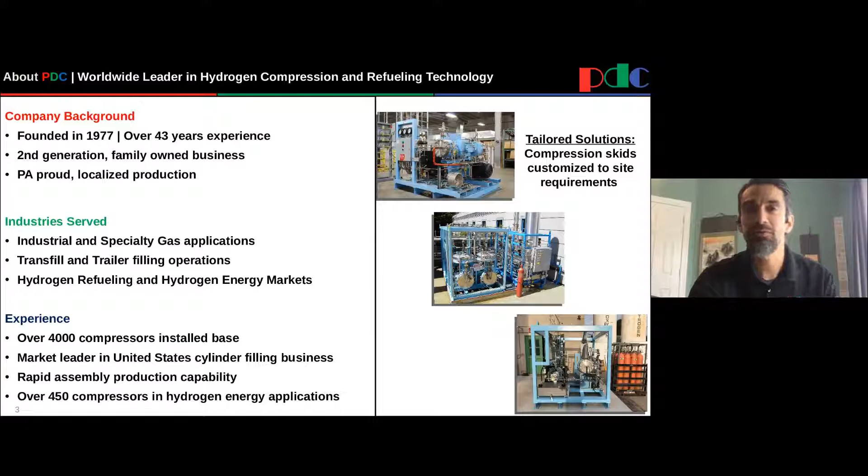At PDC, we deeply believe in a customer and market-driven focus. At PDC, we listen to our customers and the market, and then we create solutions to solve your customer problems. We provide a world quality product, which is provided to the world's codes and standards. Wherever in the world a PDC compressor needs to be installed, we could meet any of those codes or standards, whether it's ASME, CE, Pressure Equipment Directive, KHK, High Pressure Gas Law for Japan, the Chinese pressure vessel codes, KGS for Korea, Australian requirements. Wherever it is in the world, we could support your code and standards requirements.

At PDC, we have a vision to seek to make the world its most productive self by using industrial and specialty gases. And then our hydrogen vision is to cultivate a business platform that propels fuel cell vehicle usage and hydrogen energy applications through the deployment of world-class infrastructure and service. And we do this through our world operations. So we have our headquarters here in the United States, and we have sales and service directly operated and owned offices throughout the world. So we have PDC China, PDC Korea, PDC Japan, PDC GK, and soon to be PDC Europe, which will be located in Germany.

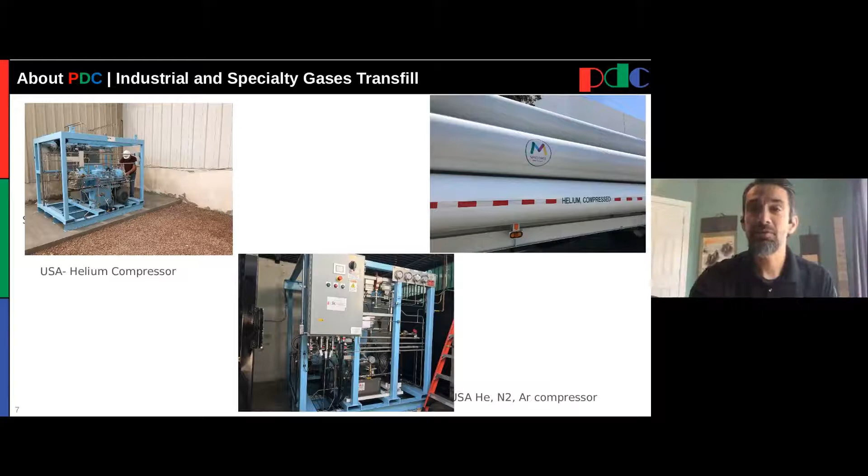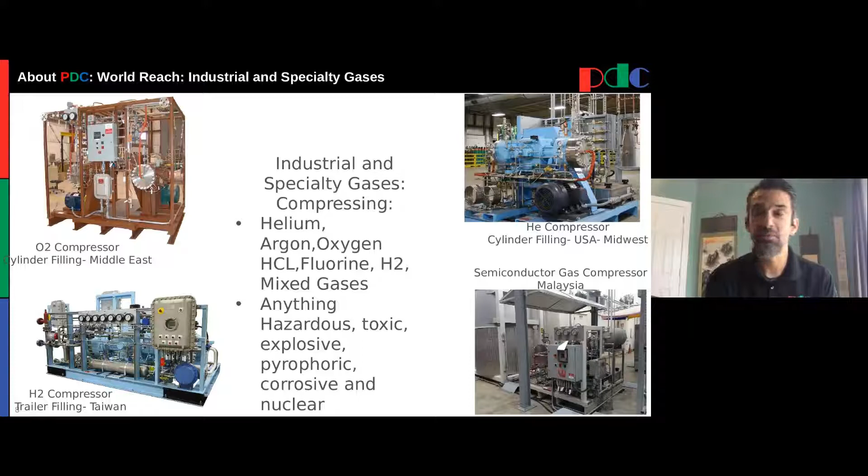Our core industries, as I mentioned earlier, are the industrial gases and specialty gas transfilling business, a variety of industrial and specialty gas applications from oxygen cylinder filling, helium cylinder filling, hydrogen tube trailer filling for industrial applications throughout the Far East, Southeast Asia, and the Middle East, semiconductor applications, and the hydrogen economy, fueling and providing high purity hydrogen for fueling transportation, people mobility, buses, trains, trucks, material handling equipment, and so on.

And how do we bring this to the market? We bring this to the market through our strategic partnerships, working with a vast network of regional partners and engineering partners to bring PDC compression technology with their local and specialized expertise to the markets that we serve. And WeldCoa is one of those partners that we're proud to share this webinar with today.

PDC is a proud partner in sustainability of the Philadelphia Eagles football team, and I will go briefly through their partnership in a slide coming up. With Ivys Energy Solutions, we're bringing novel hydrogen fueling technologies to a world market across the globe. And PDC is a partner with Argonne National Labs, which is a U.S. Department of Energy national lab in Illinois, where we are the patent licensee of pressure consolidations, which is a specialized algorithm for operating hydrogen refueling stations.

Our partnership with the Philadelphia Eagles is part of their Go Green sustainability initiative. The Philadelphia Eagles are the leaders in sustainability in sport, where they have a microgrid that offsets all of their event usage of power at their facility.

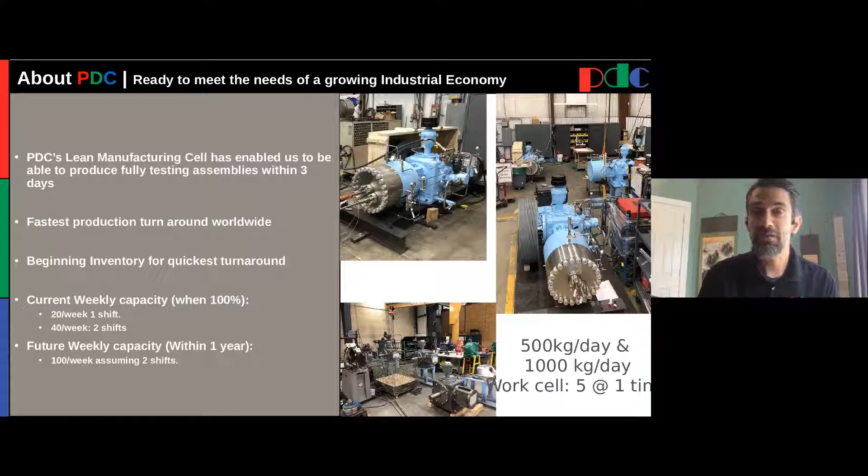At PDC, we're ready to meet the growing needs of the industrialized economy throughout the world. We have just expanded to have over 100,000 square feet of manufacturing space within our 3 facilities to support the industrial growth throughout the world. And we are growing and scaling for a lot of the markets that we're serving, whether it's industrial gas or also the growing hydrogen economy. And now we will go through a virtual tour of PDC in this video clip.

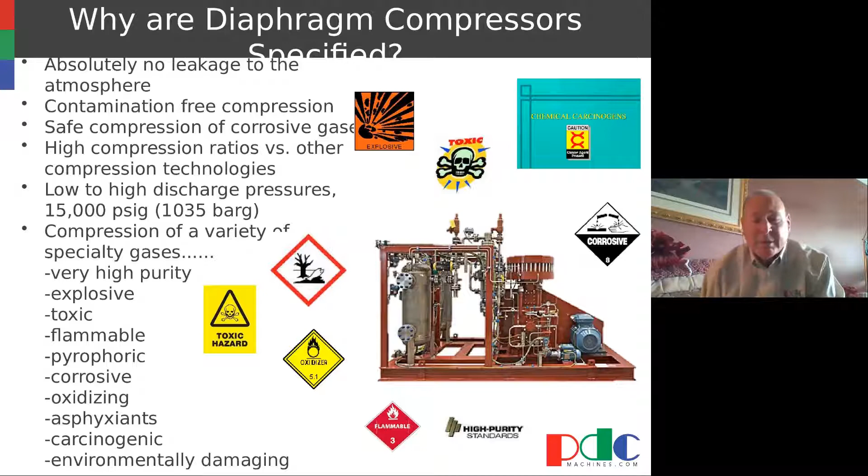So a diaphragm compressor is probably the most reliable compression solution for very demanding types of applications. By that, I mean they provide gas compression with absolutely no leakage to the atmosphere. They provide contamination-free gas compression, safe compression of corrosive gases, can achieve high compression ratios versus other gas compressor technologies, from very low to very high discharge pressures, up to 15,000 psi. Compression of a variety of specialty gases, very high purity, xenon, argon, krypton, explosive gases, toxic, flammable, pyrophoric, corrosive, oxidizing, a lot of gases that are very difficult to handle with typical piston-style compressors.

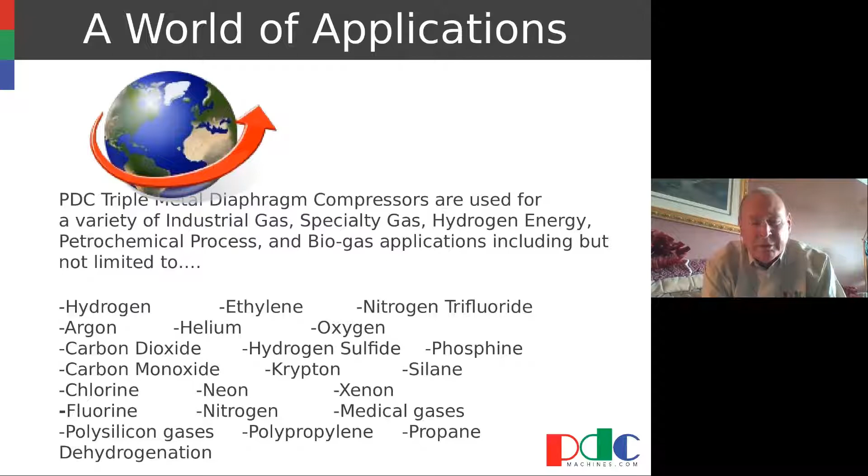PDC diaphragm compressors are used for a variety of the industrial gas, specialty gas, hydrogen energy, petrochemical processes. Hydrogen is probably the most common gas that our compressors are used with. Probably 70% or more of the compressors that we ship to the industry are being used for hydrogen in various different types of markets, but also nitrogen trifluoride, carbon dioxide, phosphine, krypton, silane, fluorine. So you can see a wide variety of different types of hazardous and high purity gases.

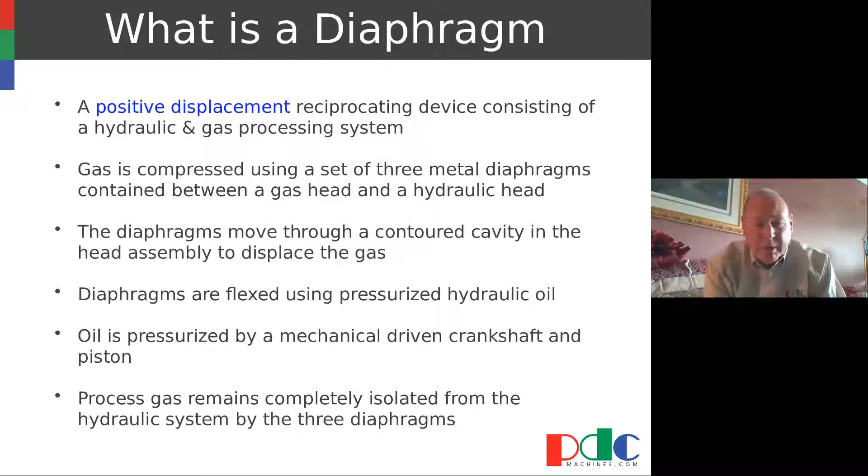What is a diaphragm compressor? A diaphragm compressor is a positive displacement reciprocating device consisting of a hydraulic and a gas processing system. The gas is compressed using a set of 3 metal diaphragms contained between a gas head and a hydraulic head. The diaphragms move through a contoured cavity in the head assembly to displace the gas, and they are flexed using pressurized hydraulic fluid. The oil is pressurized by a mechanical crankshaft and piston. Process gas remains completely isolated from the hydraulic system by the 3 diaphragms.

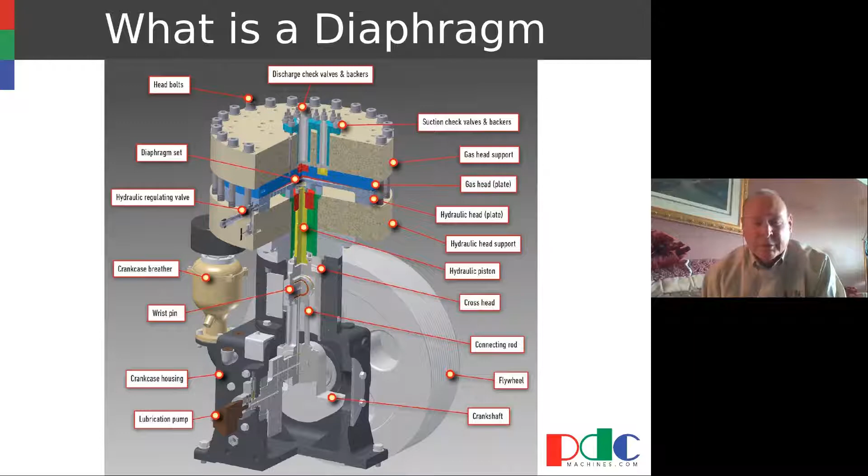So, a cross-sectional view of a diaphragm compressor, you can see the different parts of it. It consists of a crankcase with a flywheel-driven crankshaft. We're also moving towards some gear-driven models as well. That's connected through a connecting rod to a crosshead attached to a hydraulic piston, which creates the hydraulic pressure in the compressor. Diaphragms are sandwiched in a contoured cavity and sealed around the circumference by a gas side O-ring, hydraulic side O-ring, and a secondary leak detection containment O-ring. Gas enters through an inlet process check valve and is pushed out of the compressor through a discharge process check valve. Here's a short video of how a diaphragm compressor works.

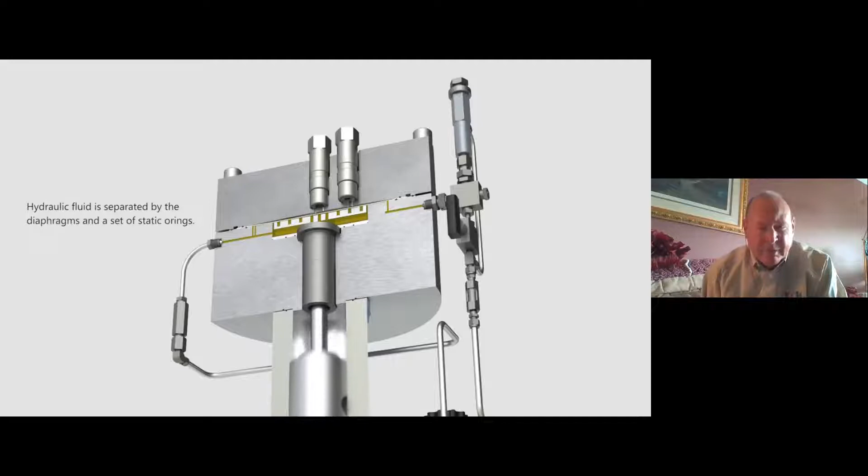Diaphragm compressor is a reciprocating machine, as I mentioned, that uses high pressure hydraulic fluid to drive 3 metal diaphragms. Hydraulic fluid is separated by the diaphragms and sealed by a set of static O-rings around the circumference. Static seals prevent process gas contamination and enable 100% purity of gas compression.

You can see the diaphragms in the compressor moving between the 2 sides of the contoured cavity. Gas enters through a suction check valve. At the same time, the piston is driving from bottom to top dead center, compressing the hydraulic fluid. When the piston reaches top dead center, gas is discharged through the discharge check valve.

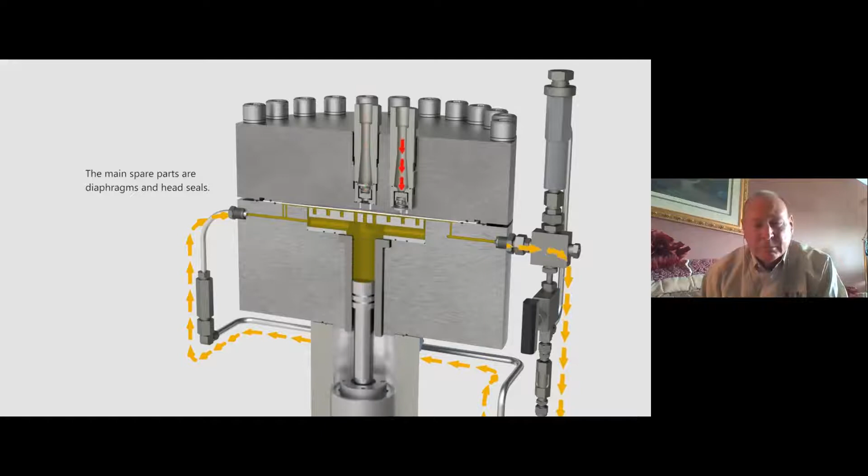Main spare parts in the diaphragm compressor are the diaphragms and the head O-ring seals. The oil is injected into the piston area through an integrated injection pump driven by the compressor crankshaft that provides hydraulic fluid on every stroke to the compression chamber.

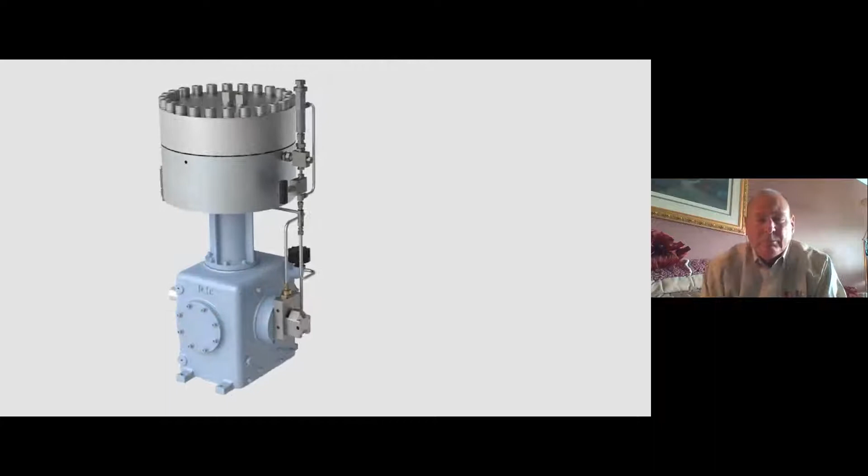All PDC compressors include a leak detection system. The leak detection system monitors the integrity of the diaphragms and primary seal rings. A secondary containment leak detection O-ring prevents fugitive emissions escaping to the atmosphere.

The leak detection system includes instrumentation, either a pressure switch or transmitter, and a pressure gauge. This provides both visual and electronic detection of any potential leakage while it's contained within the compressor. Leak detection system is quick acting and provides for alarm or shutdown of the compressor as necessary.

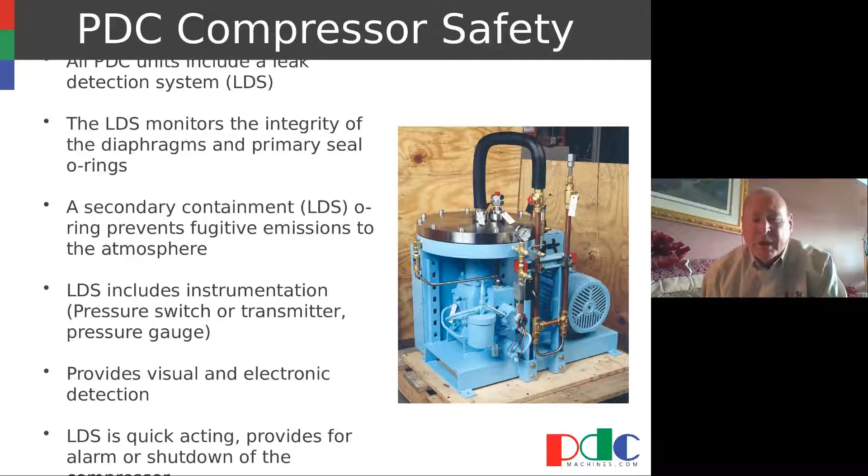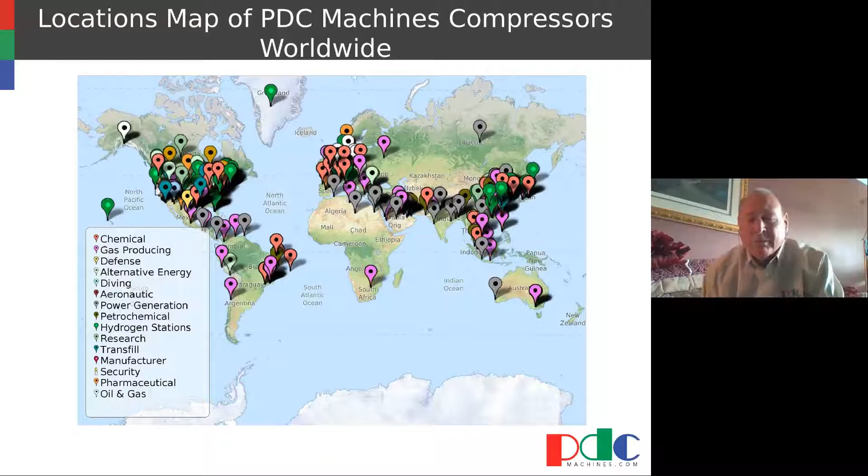This is a summary of the technical aspects of our diaphragm compressors. As I mentioned before, suction pressure can be actually somewhat subatmospheric and up to and above. Discharge pressures up to 15,000 psi, capacities from as little as 1 SCFM up to 2,000 SCFM, depending on what the inlet pressure is. Stroke lengths from 3.5 inches to 7 inches. Rod loads up to 20,000 pounds.

We have configurations of single and multiple stage compressors in vertical, horizontal, or horizontally opposed configurations, depending on space requirements and availability. And we can provide different types of packages, from a bare compressor block to be packaged through a third party, basic, standard systems, and customized systems.

Our series include the PDC 3 series, which is our small 3.5-inch stroke series up to about 10 horsepower. Our PDC 4 100 series, PDC 4 150 series, up to about 50 horsepower, and our PDC 13 7-inch stroke machine, which obtains up to 200 horsepower.

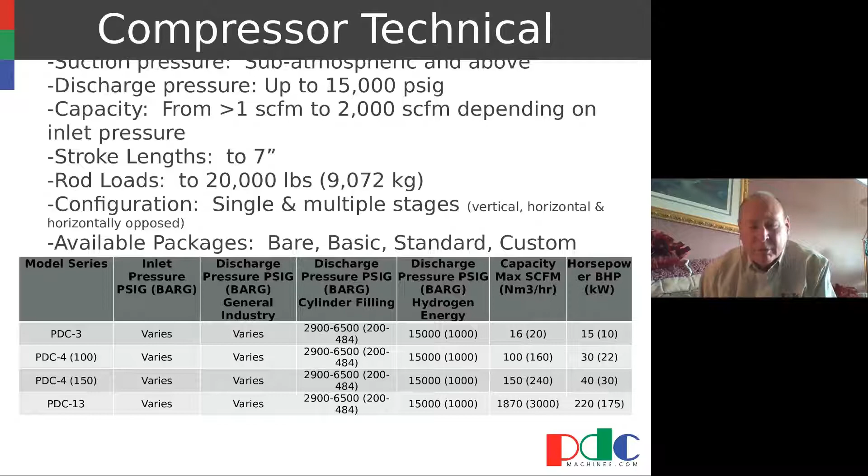So there's a brief comparison of technology between a diaphragm compressor and reciprocating piston type compressors. Diaphragm compressors using static O-ring seals and metal diaphragms prevent any process gas from entering the crankcase, requiring no need for a purge distance piece. As opposed to a piston type compressor, there will be leakage past the piston rings in the compressor, and if the gas can't escape to the atmosphere, or you don't want the gas escaping to the atmosphere, a purge distance piece will be required.

Diaphragm compressors provide very high product purity. All the moving parts are stainless steel. There's static O-ring seals in the diaphragm, so there's no potential for any contamination getting into the gas. Quality of the gas in a piston compressor is not the same, typically, as the gas purity wants to be.

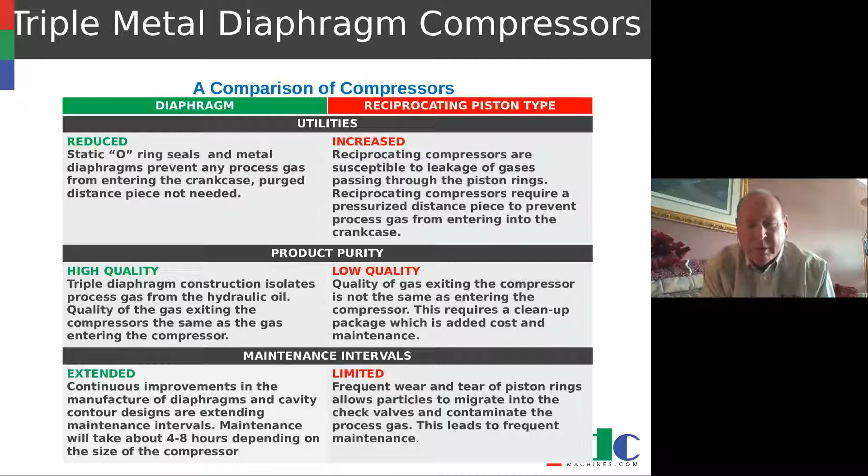Maintenance for a diaphragm compressor is usually limited to changing the diaphragms and the O-rings about every 6,000 to 8,000 hours, and that can be completed in usually about a 4 to 8 hour period. Piston compressors generally have much more frequent wear and tear of piston rings, requiring more frequent maintenance.

So diaphragm compressors provide high efficiency. We can often generate compression ratios, depending on the gas, of 6 to 1, 10 to 1, even higher. We can usually compress gases in 1 or 2 stages, whereas a piston compressor for the same application may need 4 or 5 stages to do the same thing.

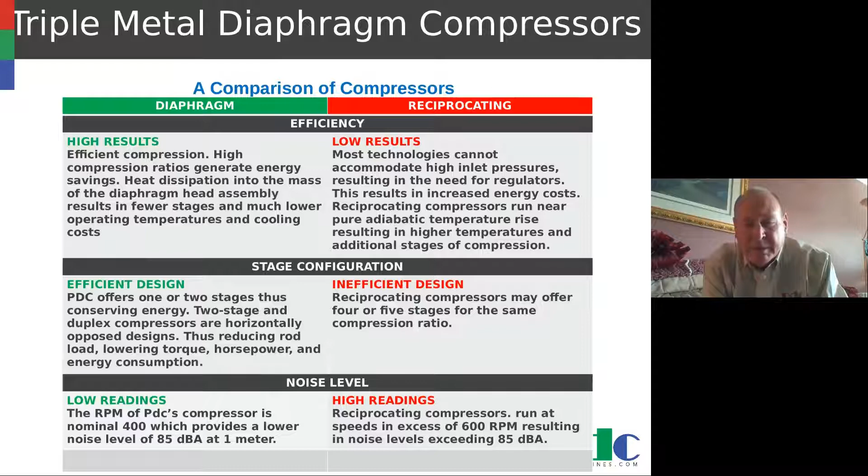Typically, noise levels of our PDC compressors are 85 dBA or less at 1 meter, versus higher than 85 dBA of piston compressors running at much higher RPM.

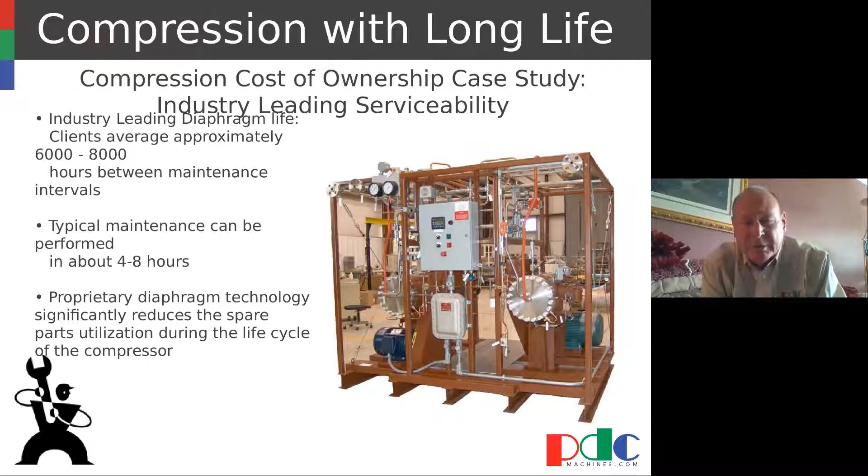Compression cost of ownership. PDC has industry-leading diaphragm life. As I mentioned, we get between 6,000 to 8,000 hours typically between maintenance intervals. Typical maintenance can be performed in about 4 to 8 hours, and we use proprietary diaphragm technology that significantly reduces spare parts utilization and extending the life cycle of the compressor.

Some installations of typical gases and technologies are where our diaphragm compressors have been placed: to Dupuy Welding Supply in Waco, Texas. This is a PDC 3 Series, model 3000-7500, discharge pressure of 6500 psi, compressing helium, argon, and nitrogen, 24 SCFM, and it's used for high pressure, high purity gas cylinder filling.

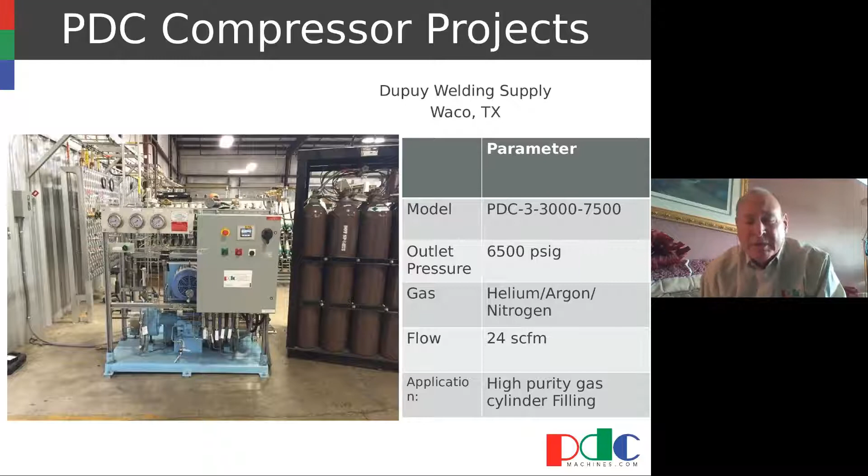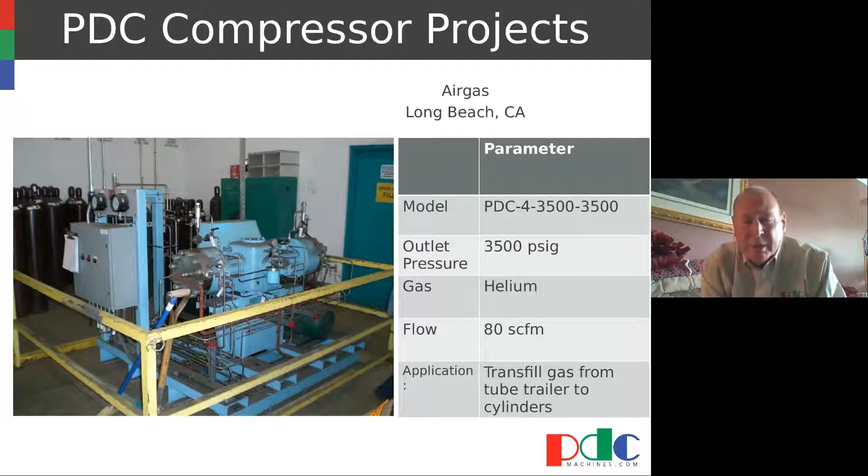An Airgas installation in Long Beach, California, having a PDC 4 3500. This is a single stage duplex model allowing high inlet pressures and fast fill rates, rated for 3500 PSIG discharge pressure, supplying helium from tube trailers to cylinders at 80 SCFM.

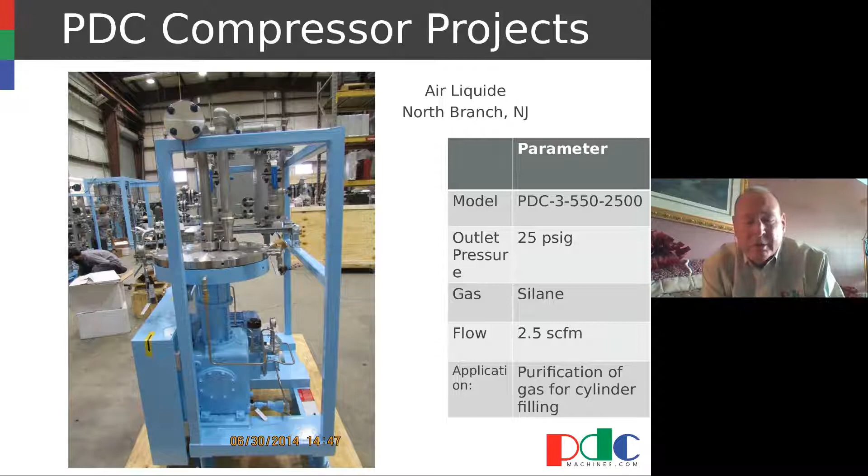Air Liquide in North Branch, New Jersey, PDC model 3-550-2500, outlet pressure of just 25 PSIG, handling silane gas at 2.5 SCFM. Silane, as you're probably aware, is a pyrophoric gas and will catch on fire when coming in contact with air. So it's very important that the gas be contained within the compressor and no leakage. So this is purification of gases for cylinder filling.

Purification Equipment Research in Hebei Province in China, PDC Model 300-2000 with a discharge pressure of 1750 PSIG, handling nitrogen trifluoride. Nitrogen trifluoride is a very, very dangerous gas, cannot escape to the atmosphere and cannot come in contact with humans or can be very dangerous. 32 standard cubic feet per minute, high purity gas cylinder filling application.

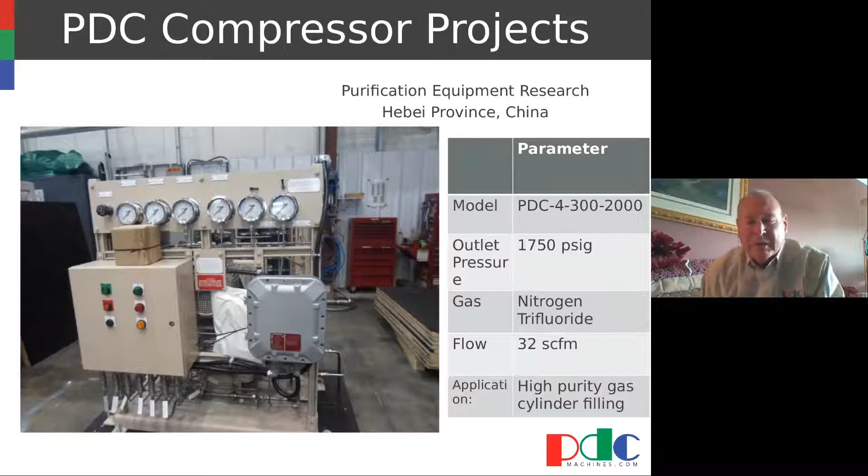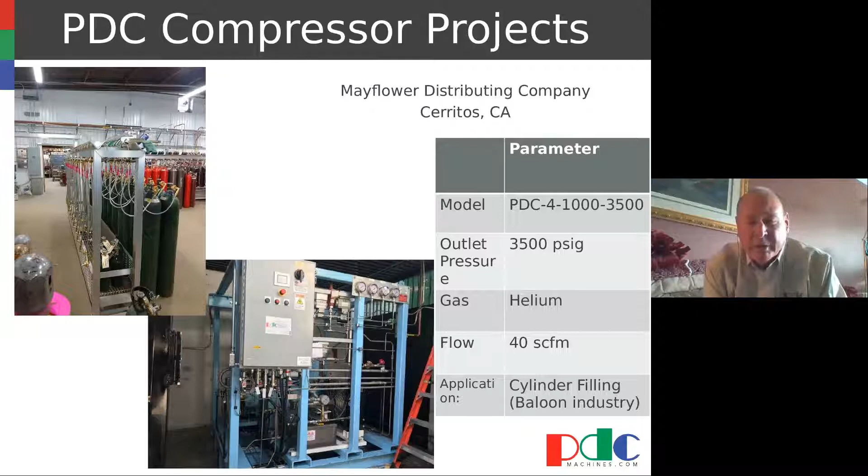Mayflower Distributing Company in Cerritos, California is a PDC 4 1000-3500, discharge pressure of 3500 PSIG, handling helium at 40 SCFM, primarily for cylinder filling provided to the balloon industry. Dollar stores are one of the major customers.

PDC provides industry-leading support. We can typically do a proposal within a few days, depending on the complexity of the specification. Sometimes same-day response is possible. We utilize a growing local international presence, as Kareem mentioned before, having offices in China, Japan, Korea, soon to be Europe, with a vast network of worldwide partners. PDC is always at your service. PDC representatives are available to assist you at any time by phone, email, or by direct visit.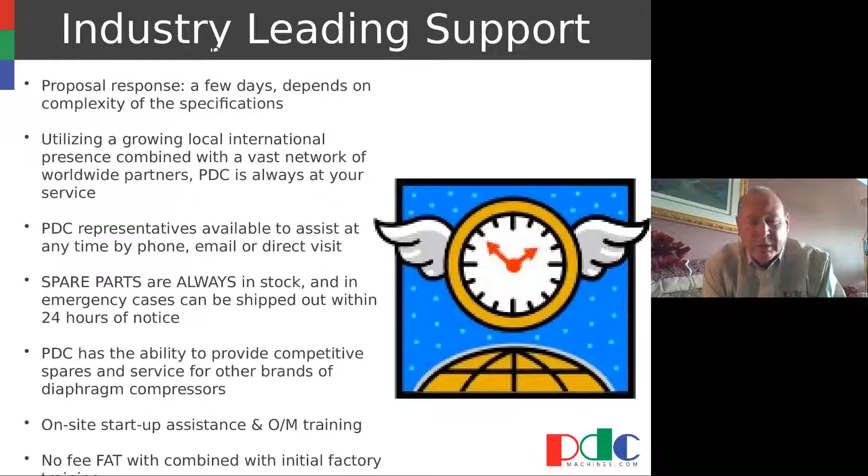Spare parts are always in stock, and in emergency cases can be shipped out within 24 hours of notice. PDC has the ability to provide competitive spare parts for other brands of diaphragm compressors. We provide on-site startup assistance and operations and maintenance training, and we always provide no-fee factory acceptance test witness and initial training if the customer would require it.

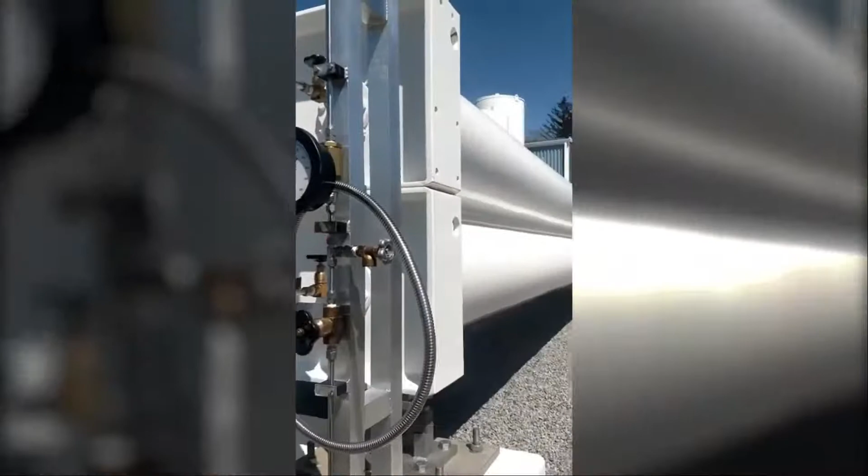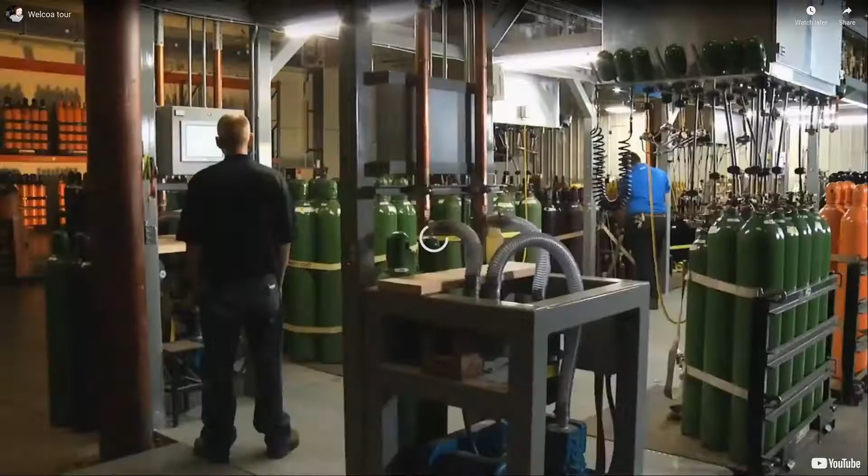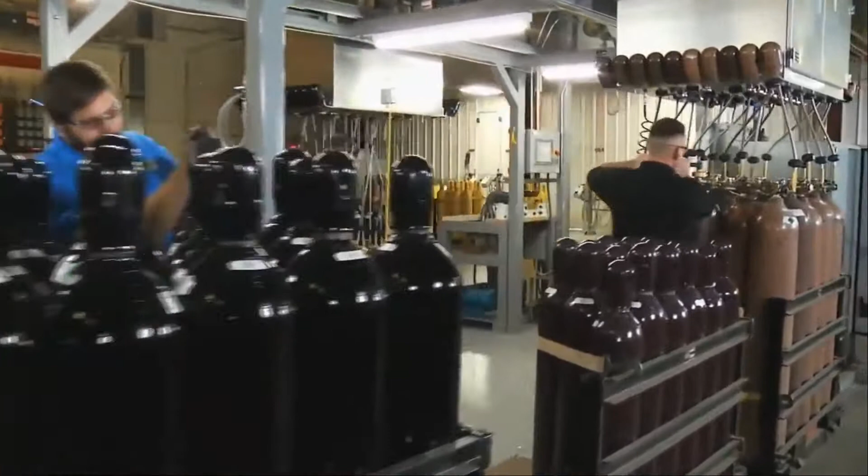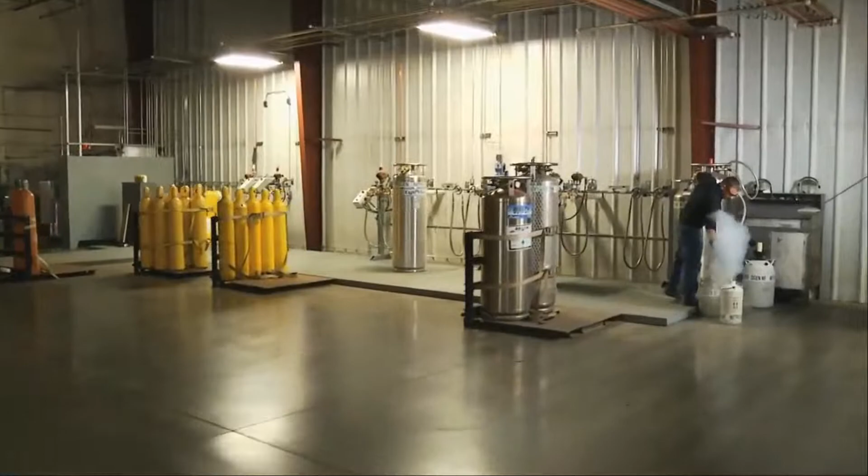And now I'm really proud to introduce our interview today. So our interview today is with Gary Gallo. He is our salesperson who is responsible for the transfill and industrial gas industry in the United States and abroad. And also we have with us Jason Casper, who is Welcoa's senior product engineer. At Welcoa, they are on a mission to support their gas distribution. From palletization to specialty gas filling operations and automations, they have continually innovated solutions that have reshaped the industry. With that, I'm going to turn it over to Gary Gallo and Jason to talk with us about these industries.

Good morning, everybody. Jason, can you join us, please? Hear me, Gary? Looks like we're having a little technical difficulty this morning. Jason, if you could hear me, could you join us, please? Hey, Gary, can you hear me? Please hang on, folks. We're having some difficulty getting Jason connected. There we go.

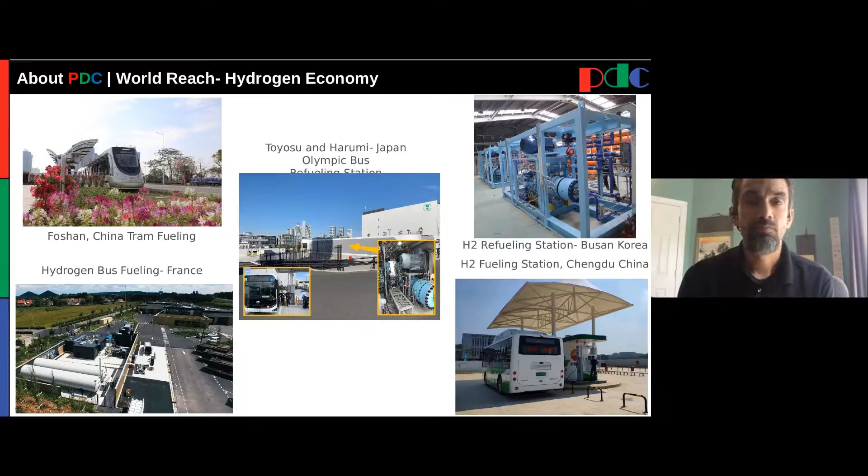Gotcha. Okay, and we have one from Alex K. And he asks, how easy would it be to convert a machine made for one gas to be used for another gas? Great question. So one gas to another depends on the gas's molar weight and density. So say for a compressor from hydrogen to nitrogen, it's a little more difficult to go from the light gas to the heavier gas than it is from the heavier gas to the light gas.

The second consideration needs to be made for the hazardous area classification that the machine needs to be installed in. So for example, a hydrogen compressor has to be installed in the United States at a Class 1 Division 2 environment, or for someone with an ATEX or an IEC explosion proof requirement, we're talking a Zone 2 2G T3 type of environment. So as long as the compressor is designed to be installed in a hazardous location, you could switch between, say, hydrogen and helium. You could switch between CO and nitrogen. It really depends on which set of gases that we're trying to do.

And we have time, I think, for one more question, if there is one. Yeah, we have one last question here in the Q&A. So Syed asks another question, and he says, what are your plans for SimpleFuel in Saudi? That's a great question, Syed. So I would love to talk to you offline about that. We have designed SimpleFuel so that it can meet any world standard with the same build. So whether it's in Saudi, Indonesia, Malaysia, Singapore, Australia, we have a project now for Australia. We have a project that we're commissioning in Japan for SimpleFuel.